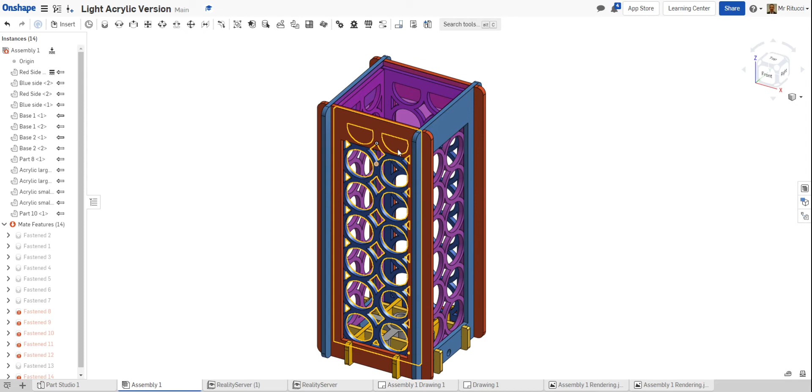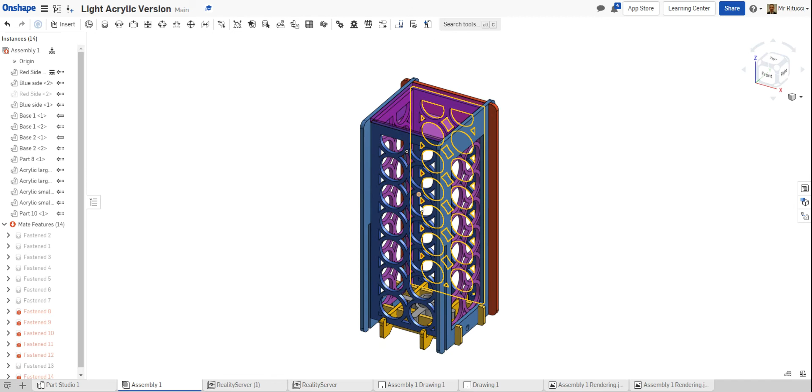Let me just hide this to show you. So behind the red and blue side we have another piece of acrylic, this piece here. Within that piece, we put a pattern because the idea is that when the light is inside here and you have your filter behind it, it'll create a nice view and it'll look good with the pattern you choose. So we're going to show you today how to create a pattern.

There's going to be a couple of ways to do this. There'll be one video showing you one way and then another video showing you another way. So let's get started.

To start, what we'll do is, like we normally do, create a new document. I'm going to call this one light filter small.

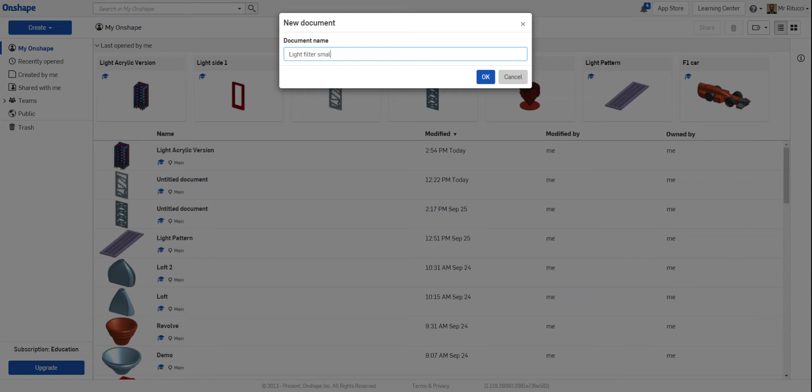Because there are 2 different sizes of light filter you need to do, we'll talk about the sizes now. So the small light filter that you're going to do has set sizes for that.

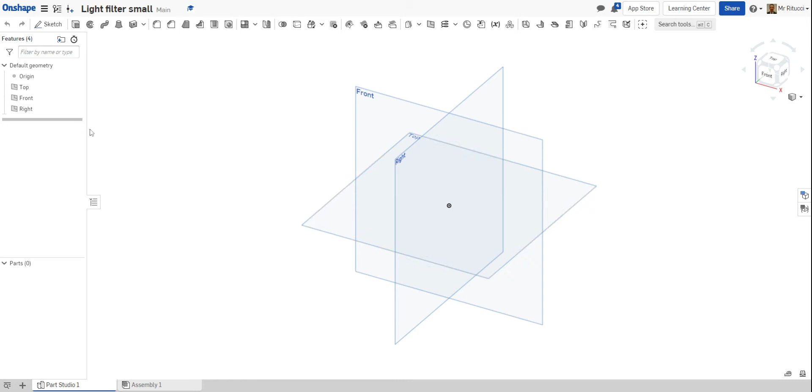So to begin with, we're going to use the front work plane. I'm going to hide the right and the top, I don't need those today.

So use the front work plane. I'm going to go to sketch. I want to sketch in that work plane, and I'm going to press N, and it flips it to the view I want. So I need to draw the outline of this filter.

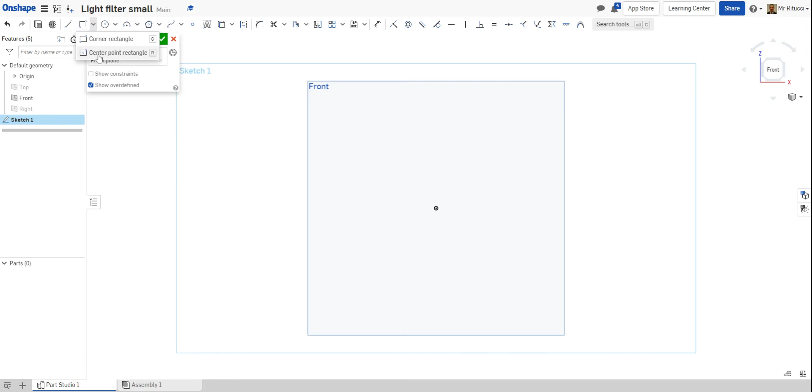To do that, I'm going to go to center point rectangle, go to the center point here, click out, and then just click once. Once I've clicked once, I now need to set the size. It's going to be 48 millimeters across, then 150 millimeters up. That's important, that size, and you need to follow the same sizes.

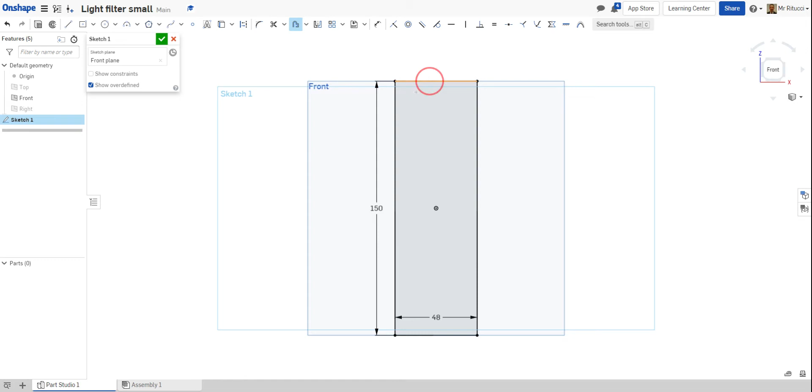So 48 by 150. Then what we're going to do is use this tool here, which is the offset tool, because I want to draw a line inside of here. This is the easiest way to do it.

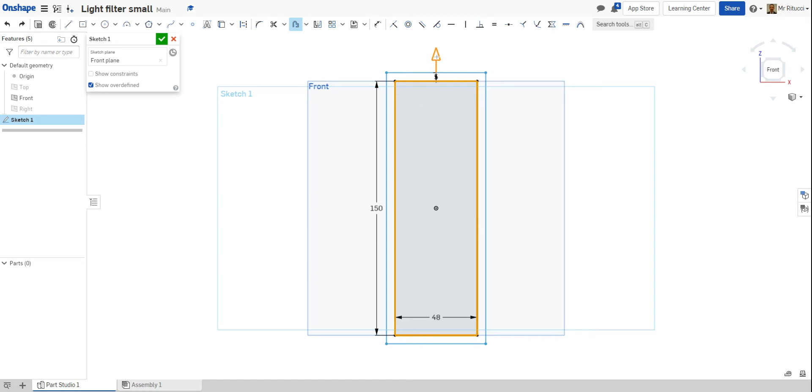Click the offset tool, and select all the lines you want to offset. Let's just undo that, it didn't quite generate correctly. So let's start again: click the offset tool, click that line, that one. Now what happens is it puts the lines on the outside, so all we need to do is flip the direction by turning the arrow, which puts them on the inside. Then just zoom in, roll your mouse, and change that to 5 by double clicking on it and typing 5.

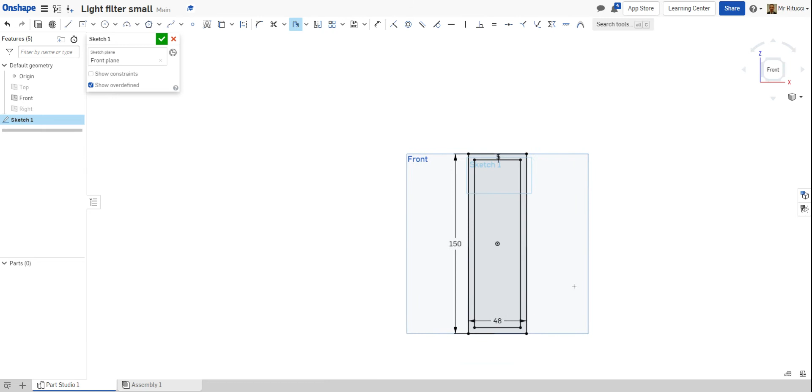So there we've got our frame. And with this design, I'm going to do kind of like a zigzag design, and I'll show you what I mean by that.

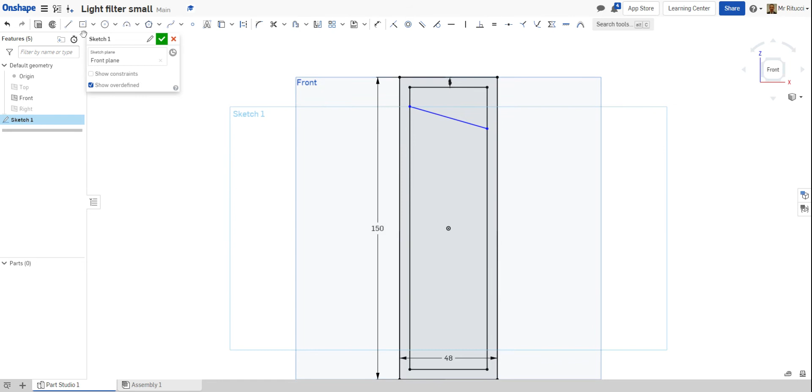So what I'm going to do now is draw some sections that I want to keep. I want to put a bit across here, like that. I'm going to press escape, and then draw another line that goes across that way. Escape that, and then draw another line that comes down to here. Press escape. Again, this design can be up to you, what you want to do. I'm just showing you one of the methods here that we could do.

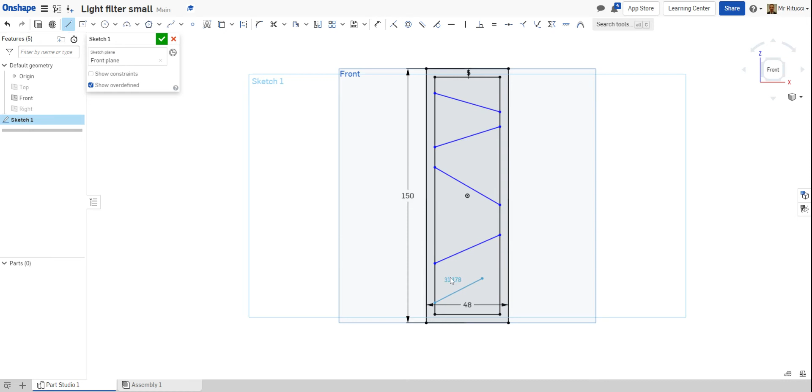And then I'm going to sketch maybe another one, like probably somewhere like... no, not that way actually. I'm going to go the other way, this way. Okay, like that. So I'm going to press escape there.

And then what I'm going to do is just use the snipping tool to snip out these bits, like that, because I'm going to push those bits through when I extrude it.

Actually, I've done that wrong. It's not quite right, that. Actually, I'm going to leave those lines in - it'll make it easier. So what I'm going to do now is just click OK. I'm happy with that sketch.

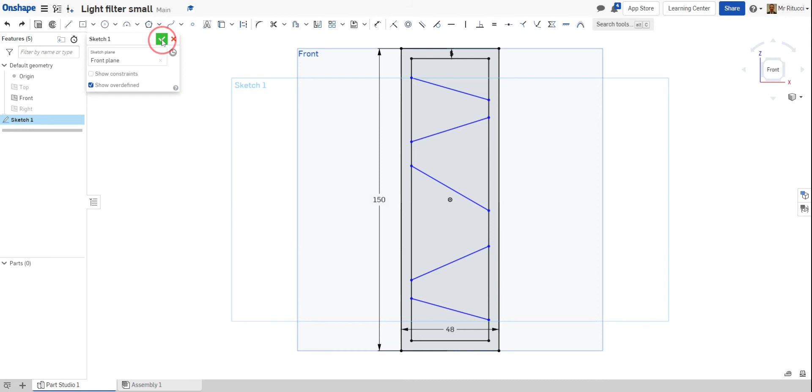I'm going to go to isometric, and what I'm going to do is spin that round.

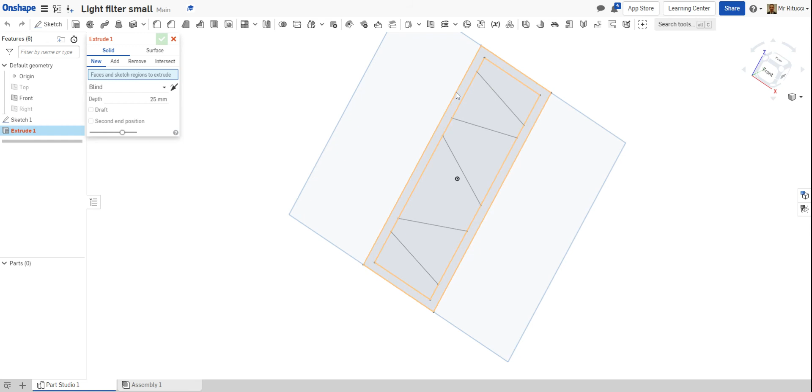I'm going to get this, and I'm going to add some thickness to it. So the first thing I want to do is just extrude this area - that area there, so the frame. I'm going to extrude that by 3 millimeters. So I've got a simple frame there.

Dead simple. Now what I want to do is get those other bits I drew and add those to the details. So that's easy to do - all we have to do is reactivate the sketch again so we can see the lines.

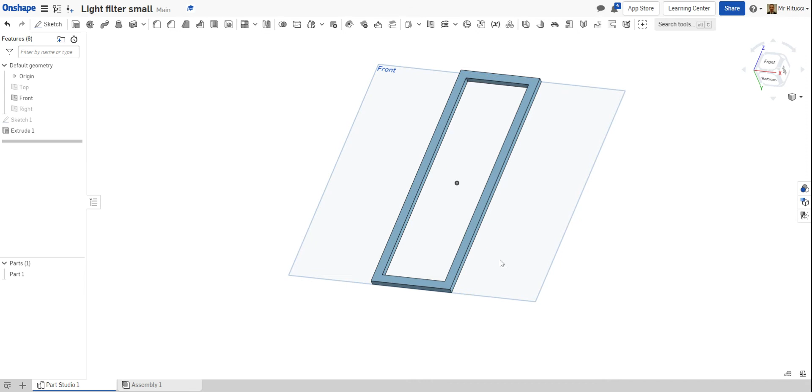So click that, and then we're just going to select the ones we want to keep. So I want to keep that one. Okay, and I want to keep that one. And maybe I want to keep that one as well.

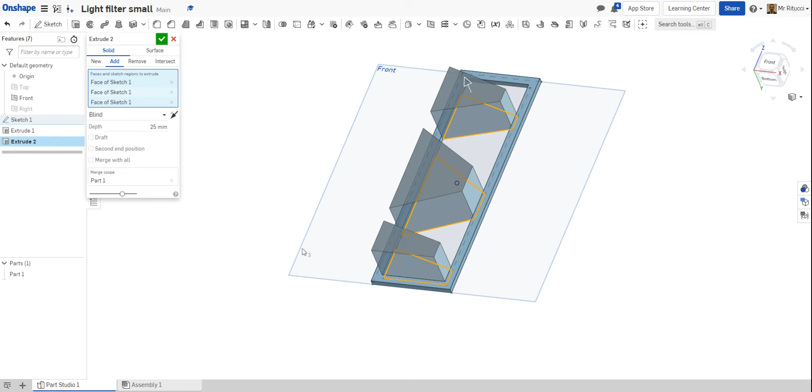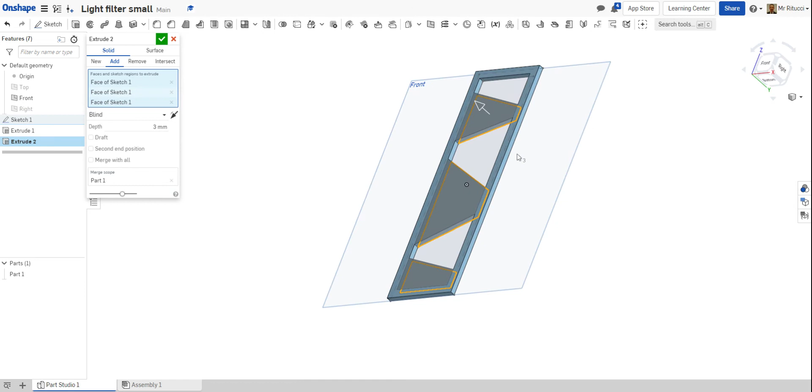Now if you look at it, we spin around, we can see that firstly it's too thick. You want to make it the same thickness as this, which is 3 millimeters. But also, we can see that has now created it the right way. So if you just click that and go OK, you can now see that you have some holes cut out.

So what we'll do now is add a bit more detail to this. Because yeah, it's okay having 3 things cut out, but what happens if you want to have a few more cut out? You can do quite easily.

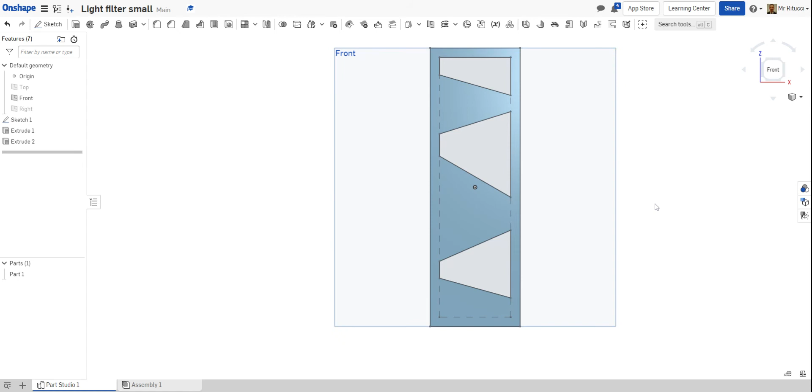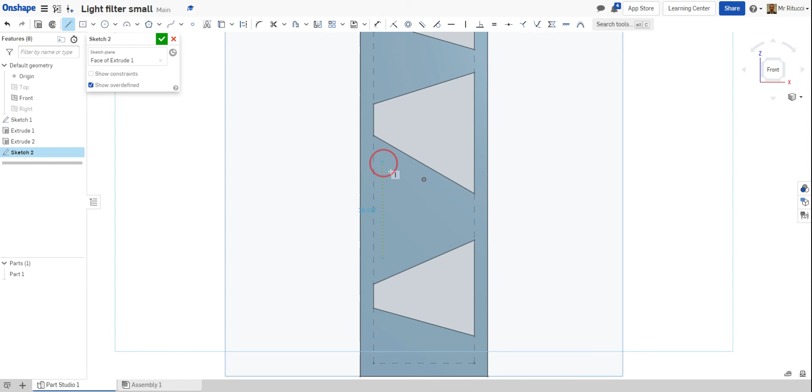So what I'm going to do is create a sketch onto here, and then I'm going to press L. And what I'm going to do this time, I think, is draw maybe a triangle shape kind of on here that looks similar to this one.

Okay, get it kind of about right. Don't have to hang over a little bit like that. Escape that - so that's one shape there, and then I'm going to do the same thing up here as well, like that.

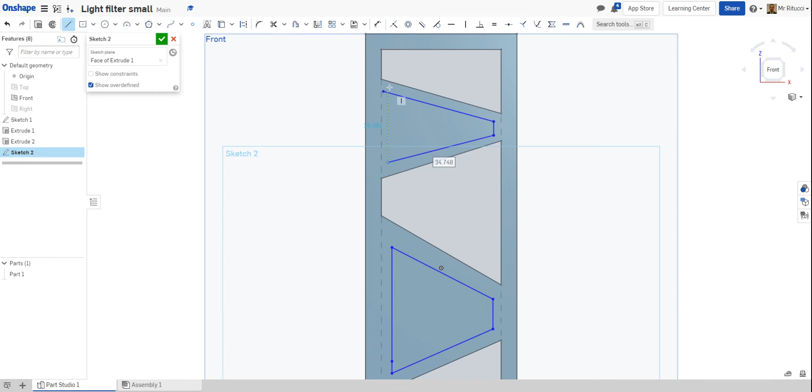So again, I'm going to follow that to there, to there, to there, and just go straight across that one and tidy that up afterwards. So, like that. Now I'm going to use the snipping tool just to cut this here and here.

So it tidies that up. You can see now I've got 2 more pieces. And what I'm going to do with those 2 more pieces is cut those away. But before I do that, I'm just going to do something.

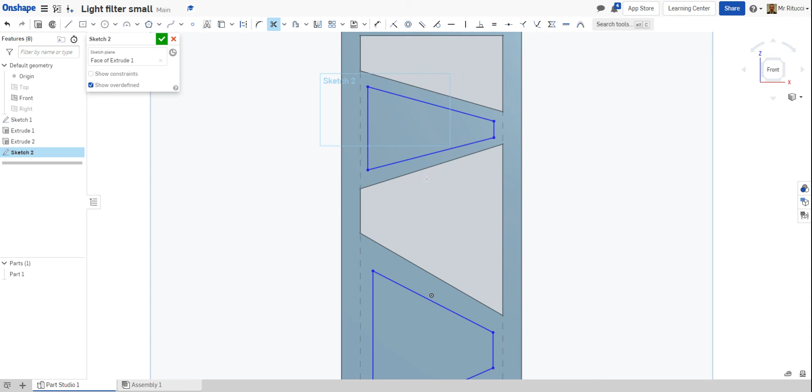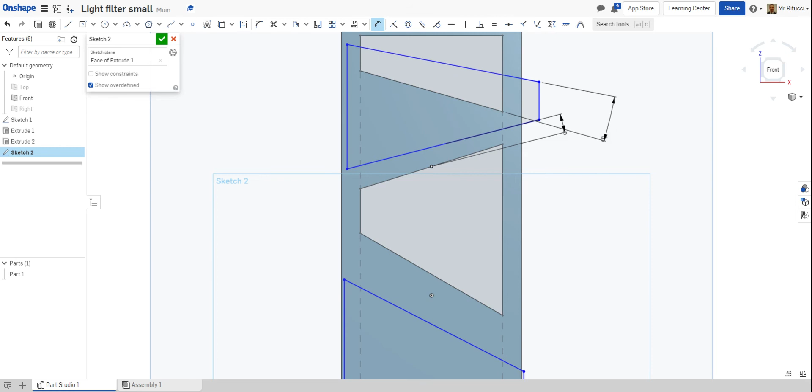So I'm going to say, okay, I want this to be from there to there, 5 millimeters. Moved it. And then from there to there, I also want that to be 5 millimeters. That didn't work. Okay, so we won't do that idea - just leave it as that.

Okay, so just leave it like that. Then what we're going to do is say, okay, I'm happy with that sketch. Now I'm going to take away these sections here and here.

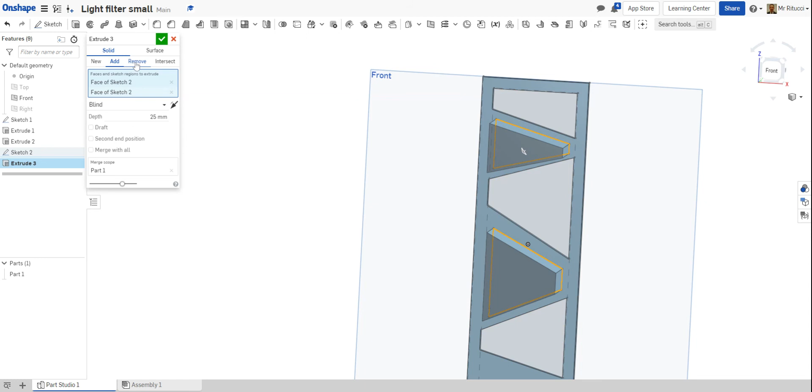Simple as before, click that, and then click that. We want to remove it, we're not adding it, we want to remove it. And you can see that it's taken those away. Click, and then they disappear.

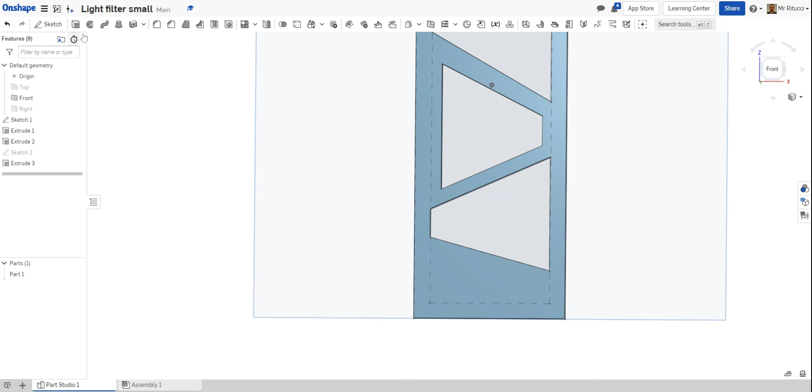So you can start to see we are building our panel up with the gaps in for some details. So this little area here, I'm going to add a bit more to that. Again, same as before, I want to sketch onto here.

Okay, that's activated now, so sketch 3. I'm going to use that line down like that. I'm going to come down to here. I'm going to go across there, and then cut up like that.

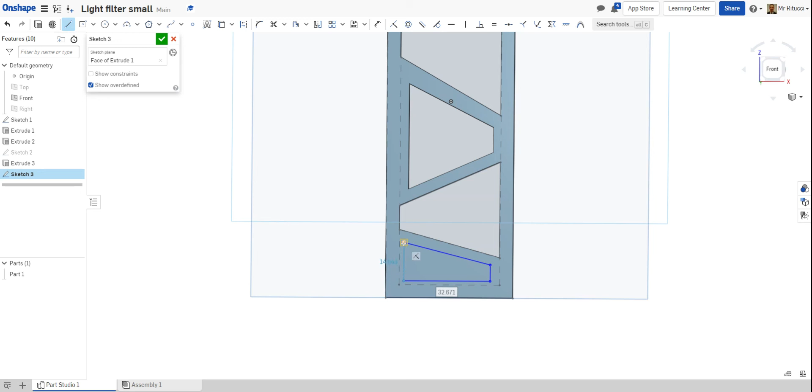Okay, and then I'm going to finish that sketch, and I'm going to do the same thing as before. Click that, click, remove, and it cuts it away.

So you can see I'm starting to build up one of my panels for the side of my light. It's the correct size, and I just chop these out by using an extrude tool.

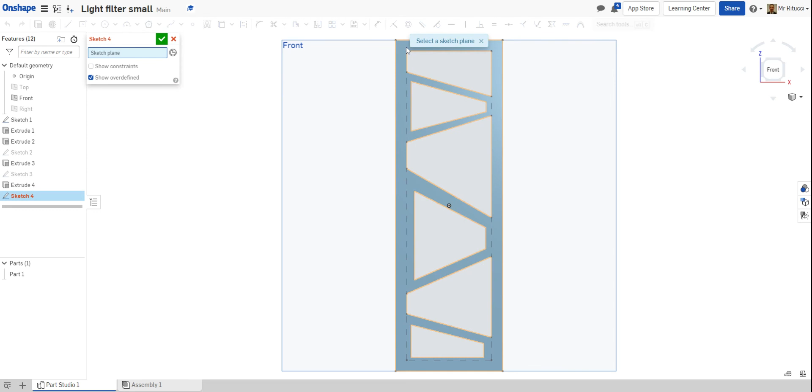Okay, what I'm thinking now is I want to just add a bit more detail. So what I'm going to do, I'm going to sketch again on this face, but this time I'm going to use the 3-point arc tool, and I want to add some arcs into here and here. So I'm going to click onto there.

I'm going to come out like that with the arc, not too much, don't want to overhang, so I'm going to keep it like that inside.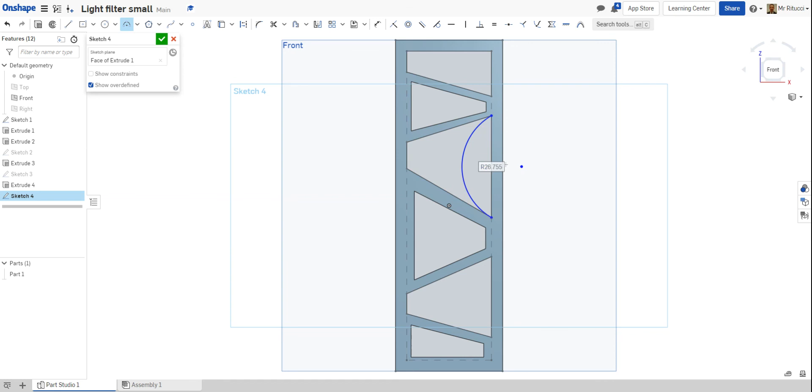And then what I'm going to do is I'm going to do another arc, but this time I'm going to use the offset tool. So I'm going to click this here, I'm going to flip it round, and it keeps it the same shape as that other one. I'm going to click OK.

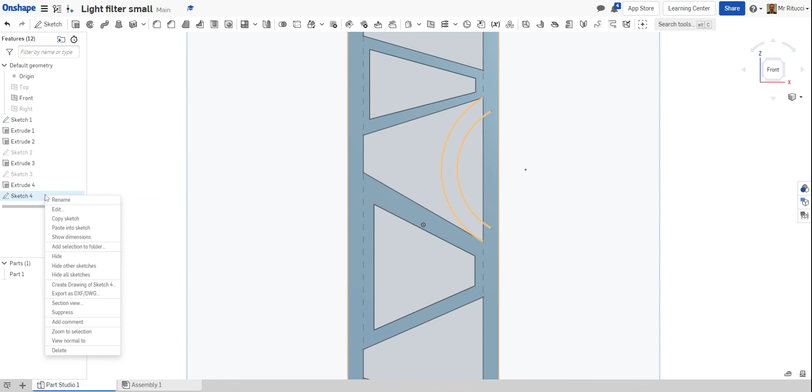And now I'm just going to - whoops, pressed the wrong OK. And then I'm just going to join the lines up. So join that to there. Let's escape, and then also join that to there.

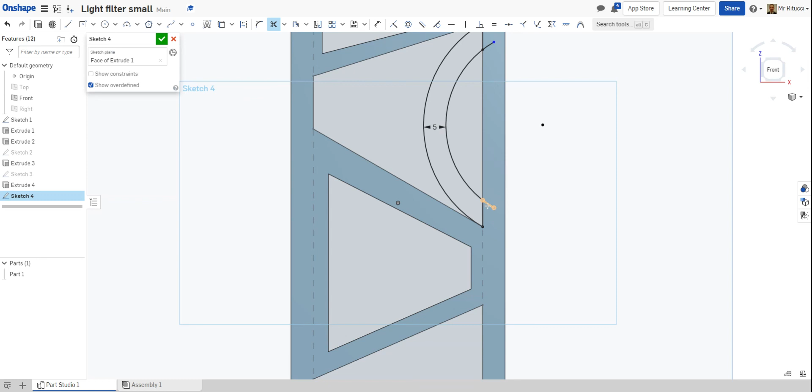Okay, let's escape. Now I'm just going to use the snipping tool to tidy that up, and I'm going to do the snipping tool to tidy that up as well.

So I could continue, and I could put another arc in here. Actually, let's do that to show you how to add more features to your design. So 3-point arc, well, let's go for point to point, flip it round, don't go too far up, maybe like there. So it's just touching.

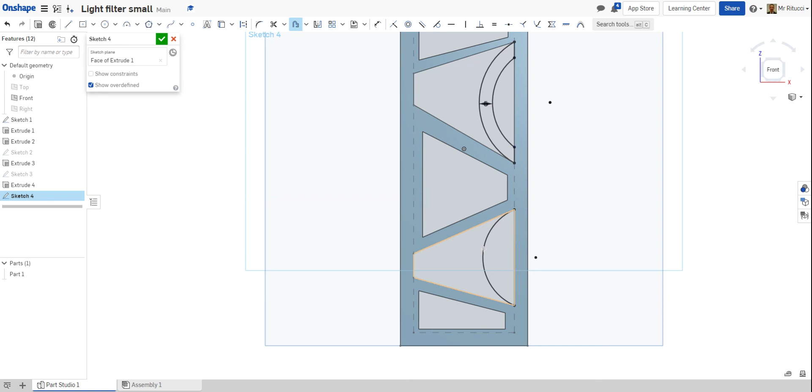And then we're going to use the offset tool, click the edge, flip it round, okay, to the distance you want. Do that. Get your line tool, click to there, okay, and then your line tool from there to there.

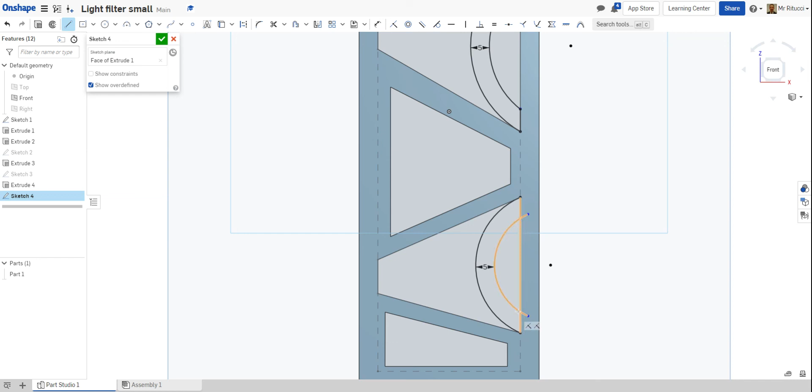Okay, escape that. And then we're going to snip out these bits and these bits. Okay, and then we're just going to click OK, we're happy with that. And then we're going to go to isometric view again, just extrude that bit as well.

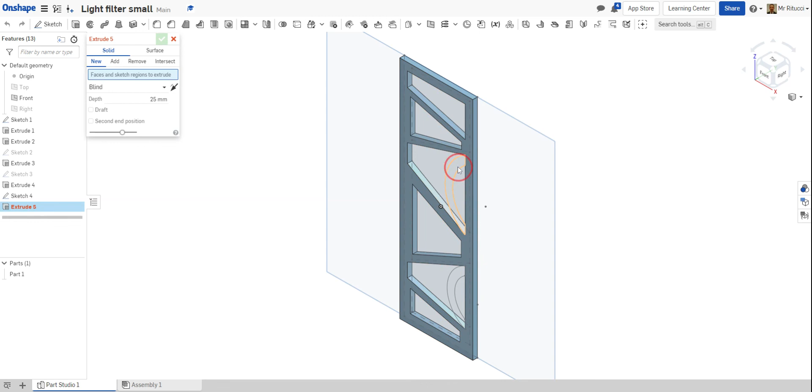So click that. I want to change direction. Okay, and it's important here you click add, because you want to add it to your design. But also you change it to 3mm - at the moment it's too thick.

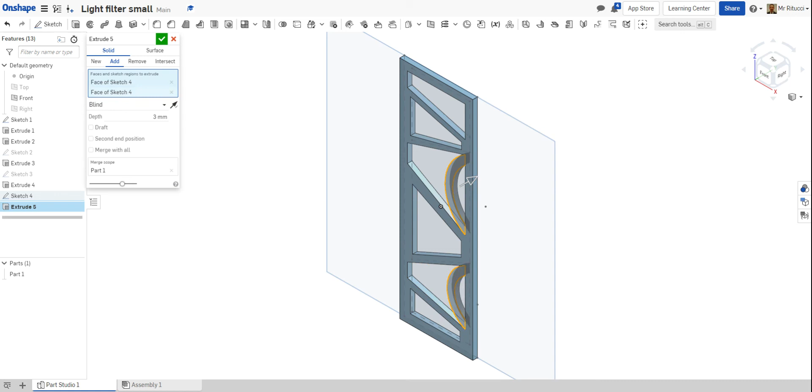So that's done that one there, and then that one there as well. And then we click OK. And you can start to see I'm building up quite an interesting pattern. And I could continue with that if I wanted to.

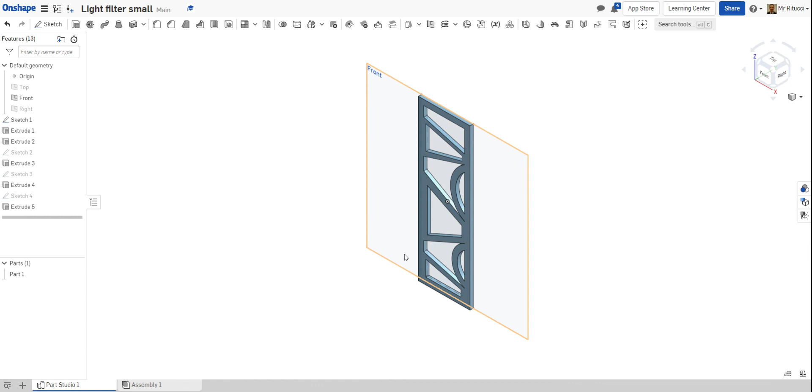I could add in a straight line down the bottom. I can add in more slots here, just by adding in extrudes to create quite an interesting pattern for the sides of your light. Now, just bear in mind as well while you're doing this, we also need to make sure we have enough space for the light to come through. You don't want to make it too crowded, because your light won't be able to get through your product.